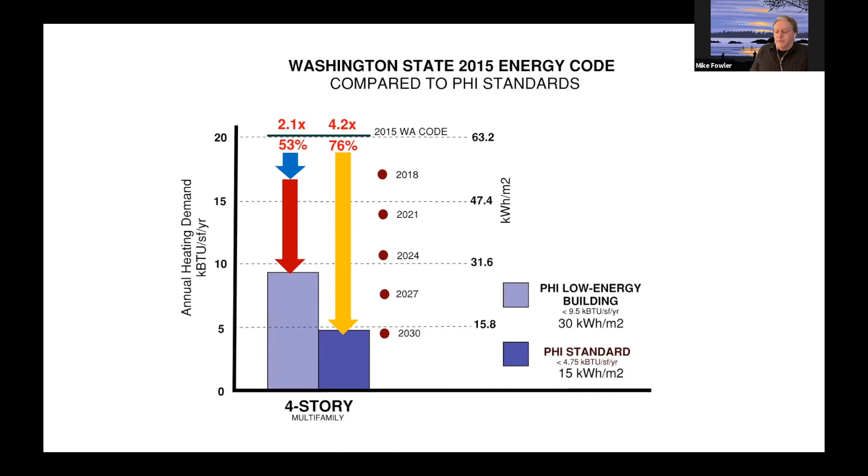Just a quick side note, PHIUS+ 2015 standard ranged from 4.9 to 6.4 for heating demand, depending on the location. EnerPHit ranges from 6.3 to 7.9, depending on where in our climate zone for the state. And at one point, I did have a slide that showed all 4 of these together, but it's just too much information in one place.

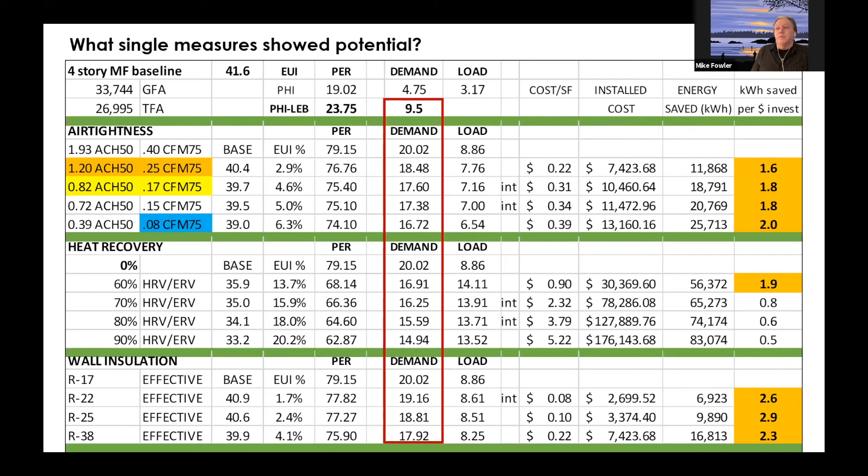I'm going to spare you the deep dive into the 20-some individual measures that were modeled on 4-story and 10-story multifamily prototype buildings. But the takeaway was clear. There are no individual measures that by themselves come anywhere close to meeting our target heating demand. And just a quick note to help folks calibrate, our commercial code uses CFM75, our residential code uses ACH50. Our current commercial code at 0.40 CFM75 is approximately 2 ACH50. The Army Corps of Engineers standard at 0.25 is 1.2 ACH, and the PHIUS 0.08 standard is 0.4 ACH.

So what did work was a combination of airtightness, heat recovery ventilation, and insulation. So that's no big surprise for folks who know Passive House. And at this point, I started sharing the model results with a friendly stakeholder group. The group seemed quite okay with the additional cost of $1,400 for each unit, which would be recovered by energy savings in about 5 years. The big surprise came from an affordable housing rep who expressed extreme concern and would not support the proposal when I mentioned the performance met the PHI low energy building level.

This friendly group also suggested breaking this package up into individual proposals. Airtightness by itself could pass, but the heat recovery ventilation was just doomed to certain failure. So I did listen to that group, but decided to keep everything bundled. Certainly a risky move in code proposals, but we were going for low energy building status and not incremental. Note that I did drop the insulation from the package, which meant I could go back and accurately tell the affordable housing rep the proposal was no longer at a PHI level, and that did gain their public support. What I kept to myself was that a similar insulation proposal was very likely coming from some other organization.

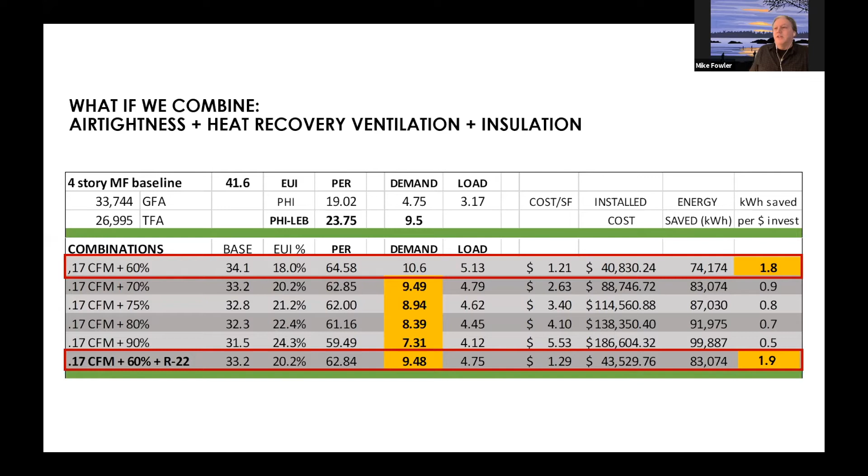So beyond the geeky model numbers, there were 2 things that really jazzed me up about this proposal. First one was balanced heat recovery ventilation. This, to me, is a big win because it means eliminating trickle vents from window frames, because this is not ventilation. The second was airtightness. Leaky buildings, they just irritate me. The fact that air can leak in from joint cracks and be called makeup air, it's just not right.

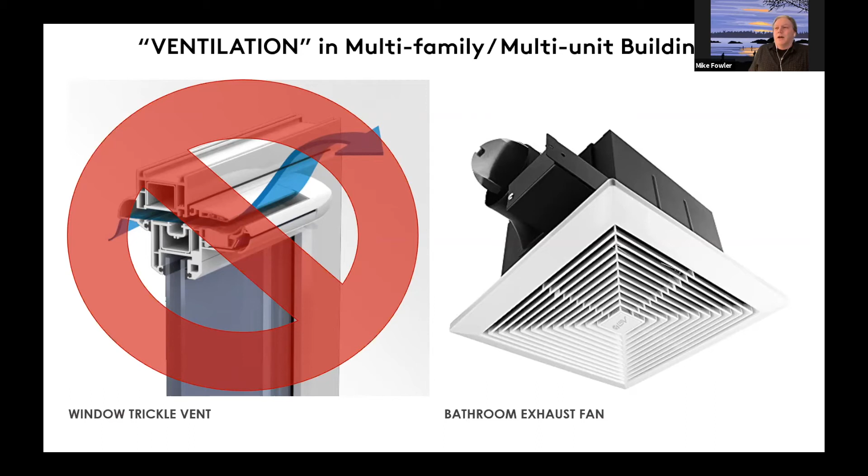To emphasize this point, I'm going to do something a little bit unconventional in presentation, and I'm going to quote myself from 2015, but hopefully it explains why I feel airtightness is so important for indoor air quality. Now, if I feel like I need fresh air, I do not want to get down on my hands and knees to snort a line of air along the top of the baseboard trim.

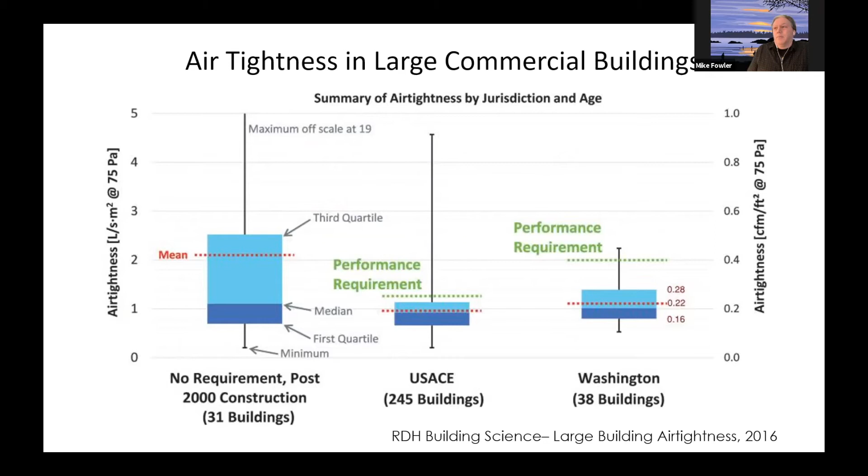So with our research and outreach complete, it was now go time for presenting this to the State Energy Code Technical Advisory Group. I introduced this as a proposal from Passive House Northwest and never mentioned Passive House again. I emphasized that if you set a standard, the industry will learn to meet it. And in this RDH report, more than 3/4 of the buildings tested met the Army Corps of Engineers standard. And building tests in Washington State were also showing the ability to meet this standard.

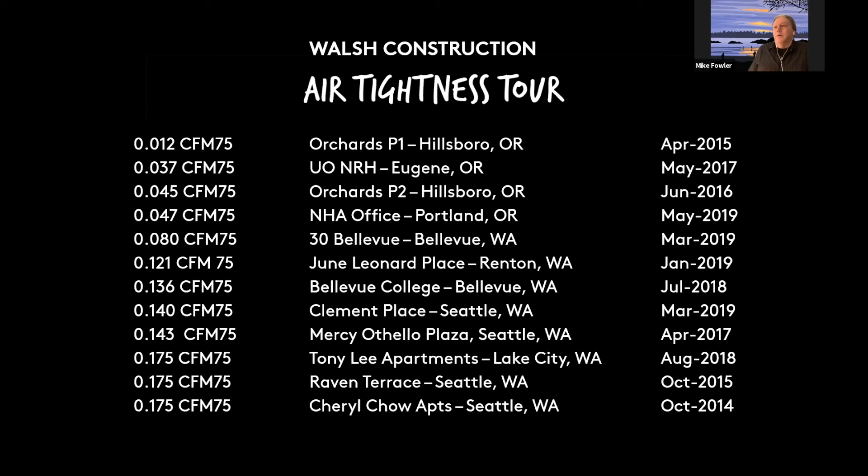The option airtightness level that was proposed was also achievable. This Walsh Construction list shows a dozen buildings they have hitting and exceeding the mark down to 0.012 CFM75. I emphasized that mechanical ventilation is absolutely essential for multifamily buildings. In this RDH study of a 6-story building with trickle vents, the lower 3 floors are consistently above the ASHRAE standard for CO2 concentrations.

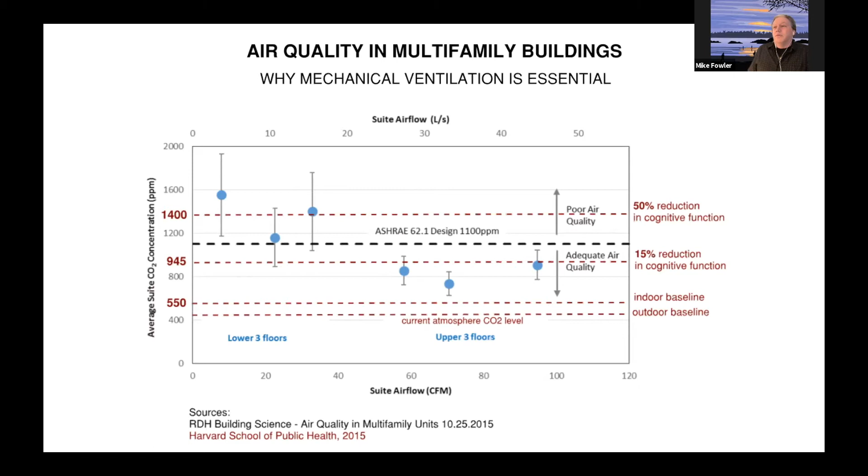And when you overlay the Harvard School of Public Health study, 2 of the 3 lower levels were typically above a level corresponding to a 50% reduction in cognitive function. And then another 2 floors, while they did meet the ASHRAE standard, had CO2 levels corresponding to a 15% reduction in cognitive ability. So what the combination of excellent air tightness and balanced mechanical ventilation does is provide exact control over where air is coming from.

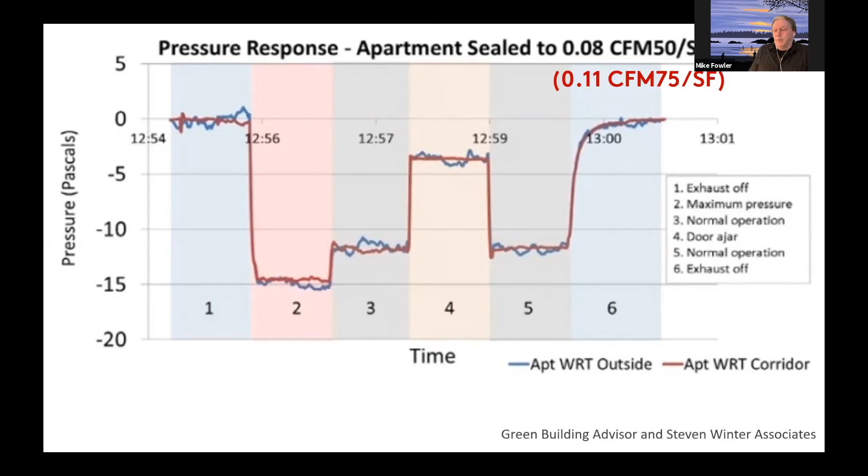And a study from Steven Winter Associates shows that turning on an exhaust fan in an airtight building creates a pressure response. When a door is opened, the pressure drops in stage 4, and we know air is coming in through the door. The same situation in the building that was around our current code airtightness, when the exhaust fan is turned on, there's essentially no pressure drop happening. And when the door is open, there's minimal pressure drop. So this means air could be coming in through the door, but it could also be leaking in from holes elsewhere in the building.

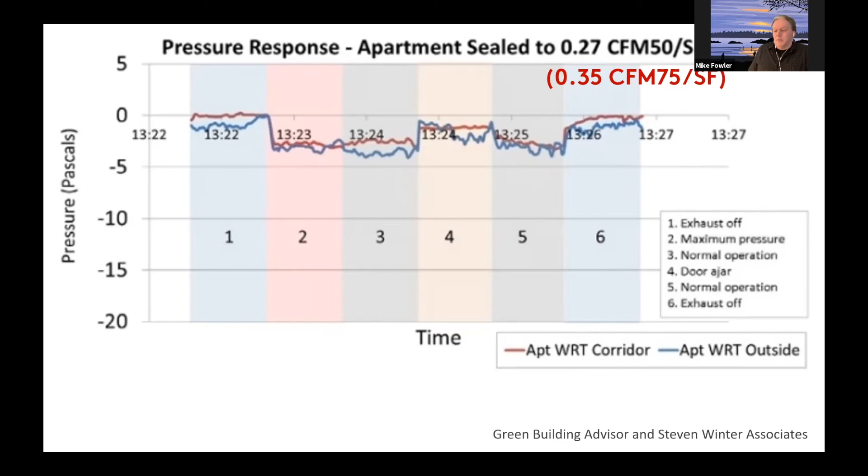And a real life example of this is when I was punch listing one of our affordable multifamily projects in California with the client's maintenance manager. In one unit, I reach in to turn on the light in the bathroom, which is right across the entry hall from the kitchen, when at the same time he's turning on the kitchen exhaust fan. And air blew across my hand. And I yelled over, "Turn off the fan, turn off the fan." And so following a very strange look, he turns off the fan and the air stops blowing across my hand.

So, hey babe, you okay there? Yeah, I'm fine. Just getting a little fresh air from the light switch.

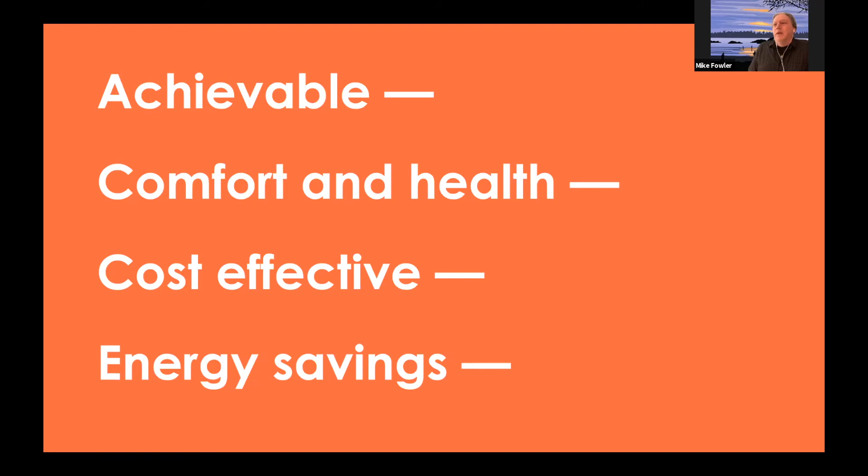So healthy indoor air is a basic human right. This was stated by the World Health Organization in 2000. I ended this Energy Code Technical Advisory Group summary presentation saying that this proposal was achievable right now. It improved the comfort and health of our fellow citizens. It was extremely cost effective and provided excellent energy savings. And I concluded that this proposal was an essential next step for the state on its path to meet the required 70% reduction in energy use by our 2030 code when compared to the 2006 code.

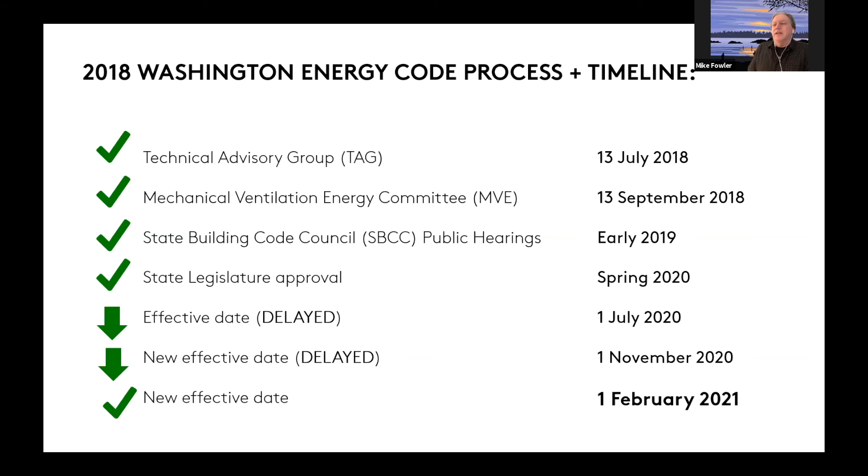So this proposal did pass the technical advisory group as it was written, bundled together. I ran into a little opposition at the final state code council hearing, but it survived. And after 2 implementation delays, our 2018 energy code went into effect on February 1st this year. So that separate insulation measure did get proposed and did pass, and that effectively completed our Passive House Northwest proposal. So what is not well known is that the multifamily prototype models do show that heating demand is low enough to meet the low energy building standard. It gets even better when you up the heat recovery to above 80% if you select that as one of your required 6 option points.

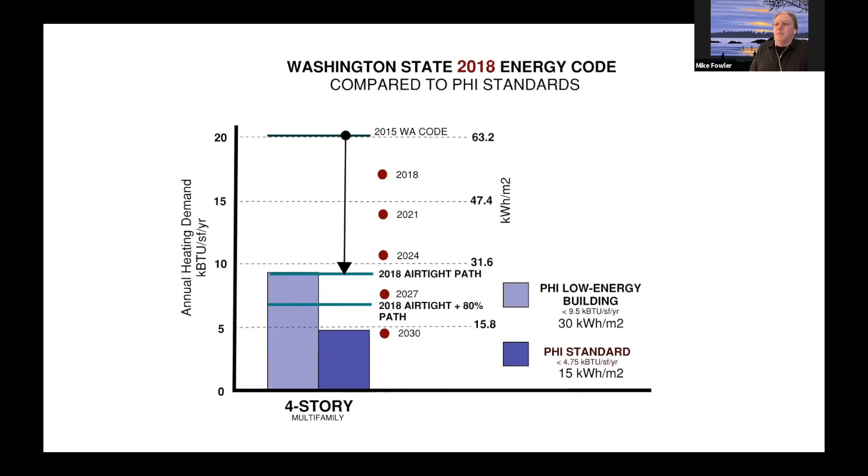So I want to emphasize that this is not a prescriptive approach. It does not guarantee every multifamily building will meet the low energy building standard. Teams still need to select the air tightness option, model their buildings, and make smart decisions to meet all parts of the standard.

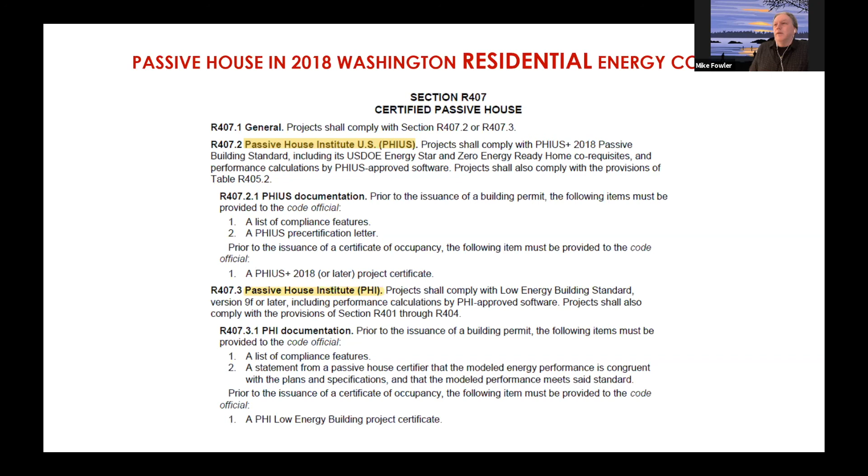And just one quick note about Shift Zero in our area. This is a coalition that was co-founded by the Northwest Eco Building Guild, AIA Seattle, and Passive House Northwest, with the idea that environmental organizations should stop fighting with each other and instead work together toward creating a zero carbon built environment. So now we have over 45 organizations in this coalition. And just 1 year later, when the proposals were due for changing the state residential energy code, Shift Zero made this proposal to the state to list PHI and PHIUS certification as one of the energy code compliance paths. And this is now also code in Washington State.

So to end, there is no substitute for being in the room where it happens. Work to get yourself and your allies into the room, making those new proposals, get yourself appointed to boards and committees, and become part of those folks in the room who do make decisions and give approvals.

So with that, thank you, Passive House Accelerator. It's been a pleasure to share our Passive House Northwest story with you and our persistence and under the radar proposal to create a path for all multifamily buildings in the state to meet the Passive House low energy building performance level. Thank you, Zach.